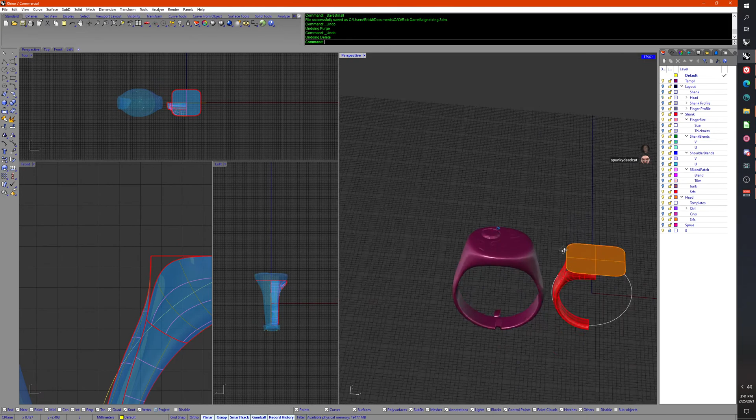I'm dropping frames because of the network. Okay, I gotta... Oh no, my network is crap. Spunky, can you see? Can you look at YouTube? And I'm like rotating the rings around. Yeah, there's a little bit of a delay, but is it choppy? Is it bad quality? All right, I'm getting red flags from YouTube about dropped packets, but we'll go with it. Okay.

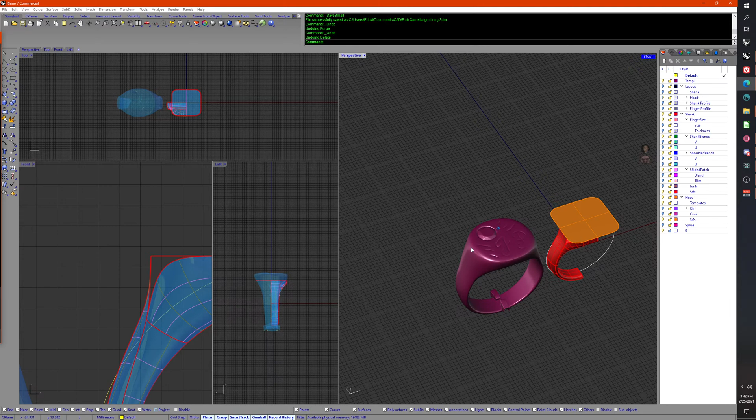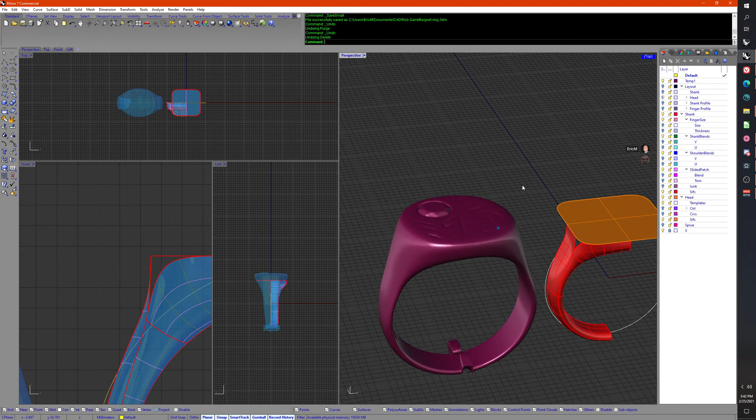All right, let's do this. So I hate making signet rings, and it's one of the things I use Rhino 5 for a lot, VSR shape modeling to make this corner. Let me pull this up real quick to show you.

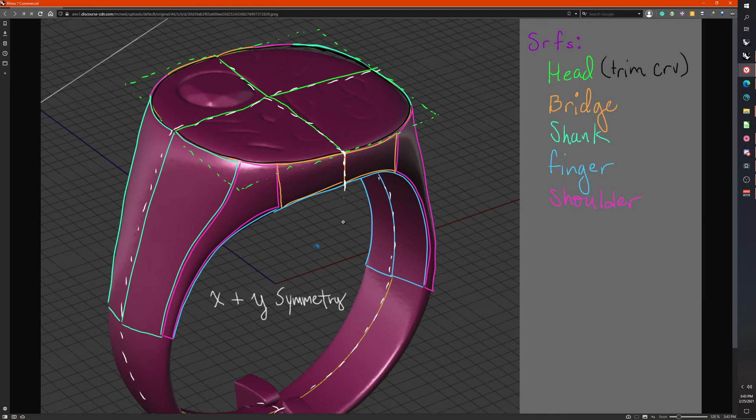Okay. So this is kind of the problem with making signet rings: you've got the head, which is pretty easy to do. You've got what you would typically call the bridge section of a ring, which is easy to do. The shank inside the finger. It's this shoulder. The shoulder, you always work yourself into a 5-sided surface, and that's where the unfun part comes in. So I usually take this into Rhino 5 and use virtual shape to make this.

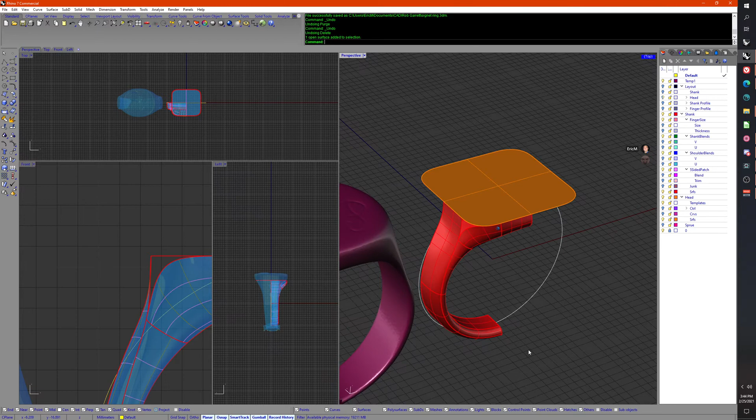And that really destroys any ability to do history. One, because I'm going back and forth to Rhino 5. Rhino 5 doesn't have the same history stuff that 7 does. And this does not look like a ring that's made for history, but I think I figured out a way to do it pretty okay.

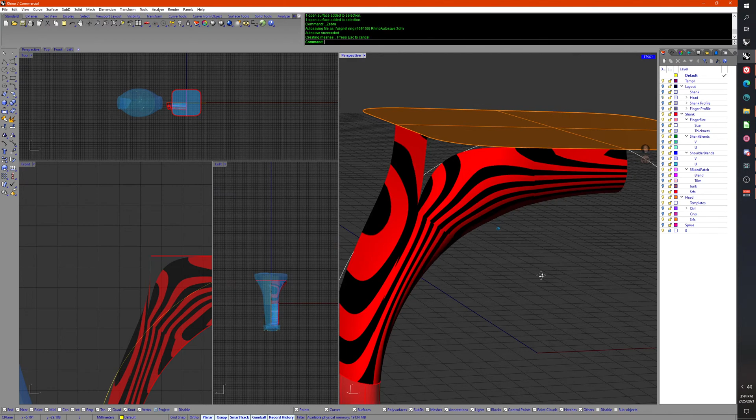Now, I'm not going for mathematical continuity between these guys, and in fact, it probably won't pass analyze surface zebra. It probably won't pass a zebra test, and that's okay because it's going to be a rough cast surface. I just don't want it to be lumpy. And I can see right here that it's got a little bit of a lump. As long as it's not too bad through here, as long as this is smooth, then a little lumpiness over here is fine.

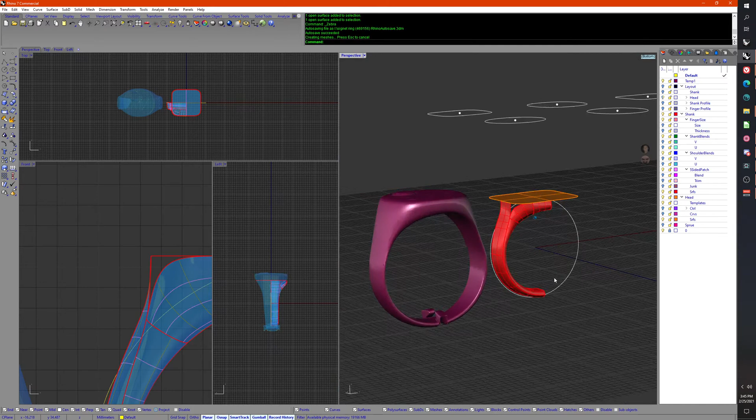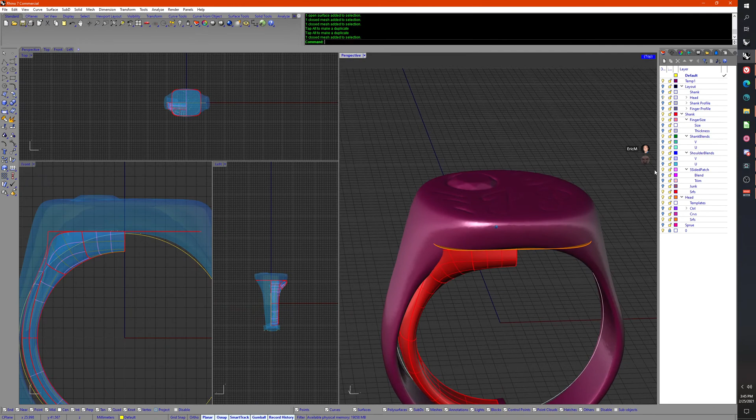So I made it into a different top shape and different finger size. This is the finger size that we're going to. This is the shape that we kind of want to emulate. So we're going to pop that over here and just kind of center it. It's a 40-year-old signet ring that was hand carved, so it's not perfectly symmetric, but that's okay. So I've got that on our temp layer so I can turn it on and off, and we'll just lock it so we can't accidentally select it.

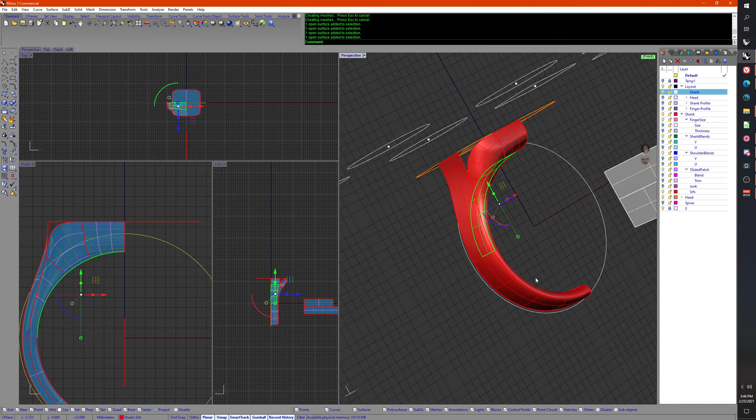So you have a layout panel here. The head, so this controls the height of the head over the ring, and we have this, which is where we do our layout curves. Those will come up down here in the head. All right, so we have the head for the shank. This is just for doing history stuff. So this maps to this, and this maps to that. And it's for putting down some curves so we can get a blend that's not really lined up with an ISO curve.

In fact, when I look at the Shank Blends, these guys, you can see they're coming off at an angle, and they're over here for me to edit like this while I'm looking at the shape of it over here. So I can see that's not the shape I want. I want it to kind of be straightish. All right, so those are our shoulder blends, and that's the shank. I showed the head.

Then we've got two shank profiles. We've got this one and this one. Now, usually when you do a signet, you would have one profile, but this profile is tied to the inside shank surface. So that's the finger profile. And I did two, so you could make these comfort fit. The outside shank, which is this guy, the outside shank and the inside shank. Put the left view on here.

You can see that this is the inside, and you probably won't have to edit it unless you move it back to a standard, like if you pop this out to be the same level, like you were going for a regular signet. And I know that blend is kinked. That's something we'll have to fix. But you shouldn't have to move it unless you're changing this from a comfort fit, and that's what I do most of the time.

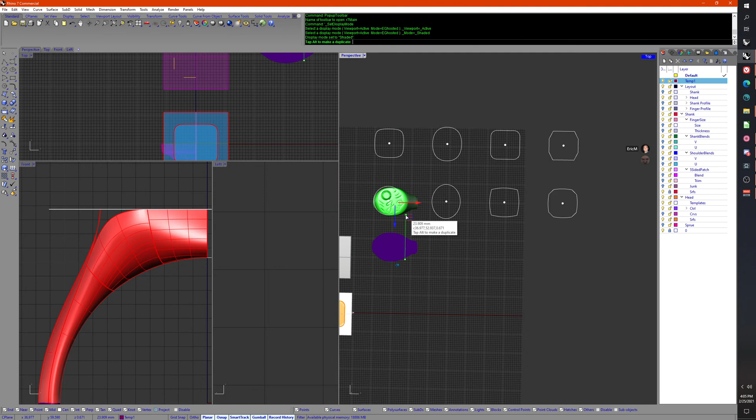Just show everything. Okay, so we have templates over here, these are common shapes that I can just grab for tracing. The curves are still off. So let's look at our ring and see which one it looks like the most. I'm going to change this to shaded. Oh, changed the wrong viewport. Shaded. And let's just see, not quite round, but it's roundish. Okay, so I'm going to grab this template and just move it to the center of there. Okay. And we can lock that.

Your control curves are these two curves right here. You have junk, which is the blend between them. And there's probably some more junk over here. Let me turn that off. The curves that actually make up the surface, that's these guys, and then the surface itself. So that's pretty much it to the head. It's a lot simpler than the ring.

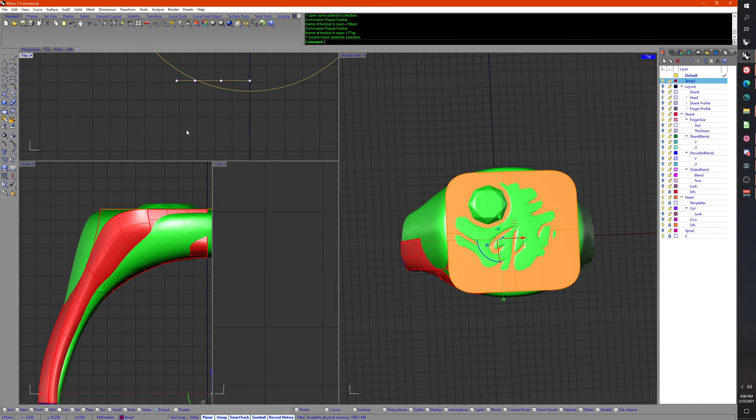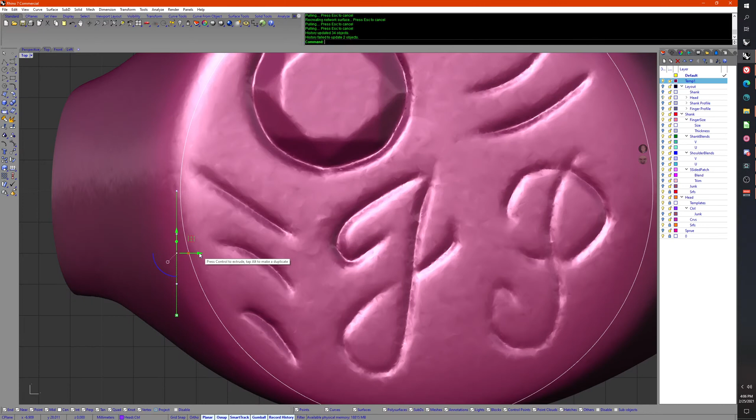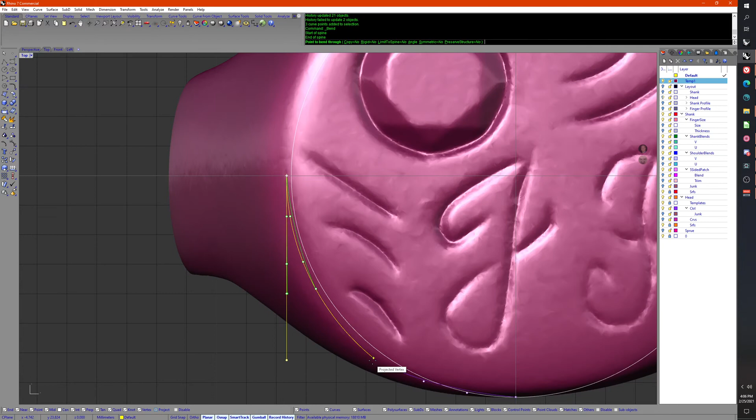So I'm going to bump this up by 30 so it's underneath. And I use 30 a lot in modeling for setting up different areas. And this, we'll set that Y down to there. And this, it looks like a little bit wider circle. Maybe something like that. And then leave these points on. And just kind of bend this up. Bend. Just kind of bend that in.

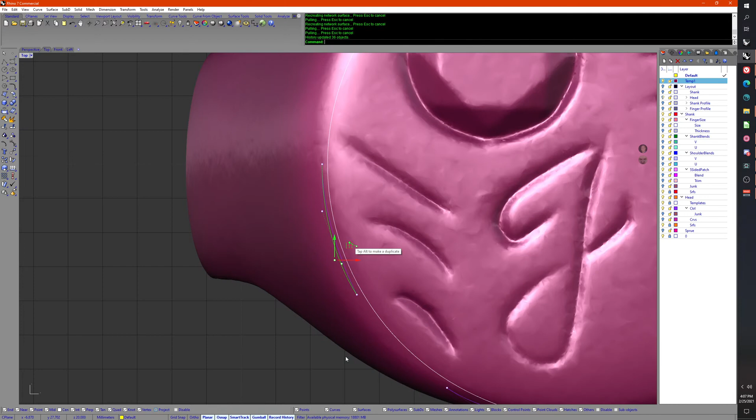This needs to be on the same X though. So I started bending a little too early. Nope. Well, that looks lumpy. Does this look lumpy? I'm not used to this layout because, okay, so we need to edit this to reset it because Rhino things. Still looks a bit lumpy.

It'd be easier if I was just actually matching this white curve instead of, you know what, let's do that. Because this is basically a little bit wider of a circle.

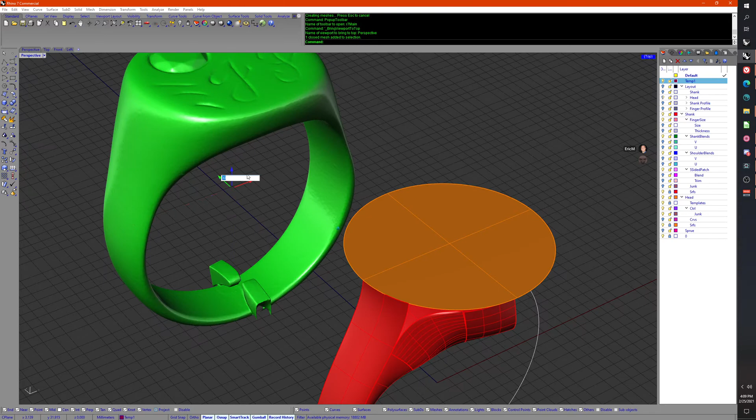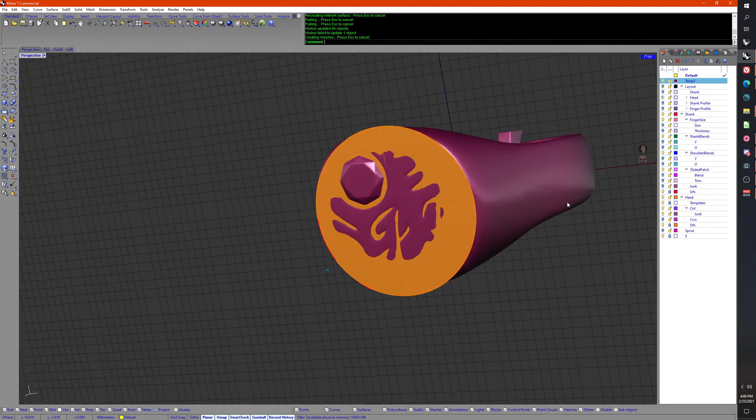Just match that up. Edit that. Boom, boom. All right, we need to give it a little bit more breathing room. Okay, that's a lot smoother. Okay, so if we look at our ring and bop that back -30, we need to make it a little bit bigger, I think. Scale 2D off of there. Okay. I think that looks good.

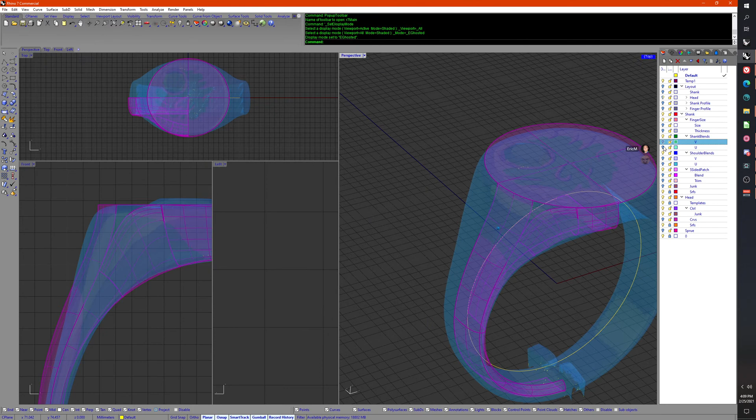Okay, so this shank is, let's go back to our normal views. So this shank is tapered in too much. The guy really liked this older class ring and he wants one just like it. So we did our finger size. We did that first. The thickness is okay. So the Shank Blends, that's the U. Let's look at the V's. There's the V's. Okay. And look, two curves came alive up here.

Take this, move from the endpoint to the edge, and take that, move from the endpoint to the point. And what that did was line up this surface with this edge, because this is controlling the angle of that. So if I want to match that, it's a little thick through there. And again, this was a hand carve, so we just need to get close. And this one, take and get that to kind of match. There we go.

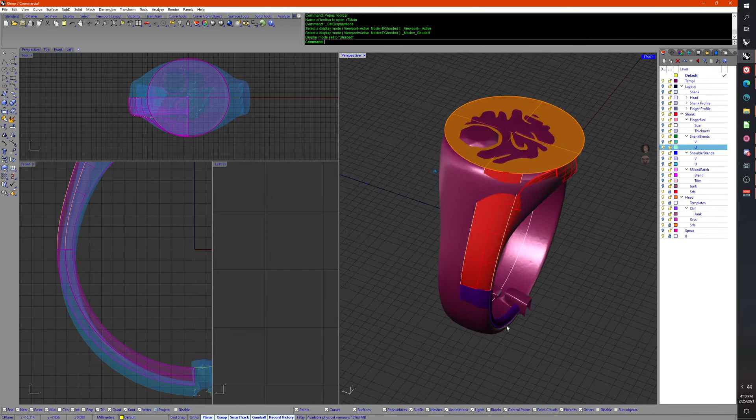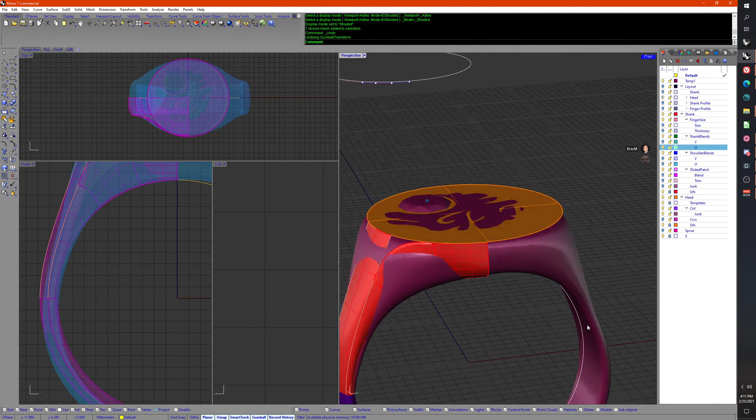So not a perfect match, but that's okay. I think it might actually match better on the other side. Rotate 180. Yeah. See, this side it's too much. That side it's not enough. The one bad thing I'll say about having a scanner is it makes me worry about this stuff way too much. It doesn't matter. It'll feel the same even if it's a little bit off.

All right, let's turn our scan back off. And then you can see that this has fallen out of line. So that was the Shank Blends. And now the shoulder. What did I name it? Put that on. Shoulder Blends U. Okay. So the reason this is all janky right now is because this needs to move to our endpoint. And this needs to move to an endpoint.

And that makes sure these curves line up right with, it's on the junk layer. These curves line up exactly with the segments on this head. Unlock it. We want those three sections to line up with our three pieces over here. And now that does. Okay, let's look at these blends.

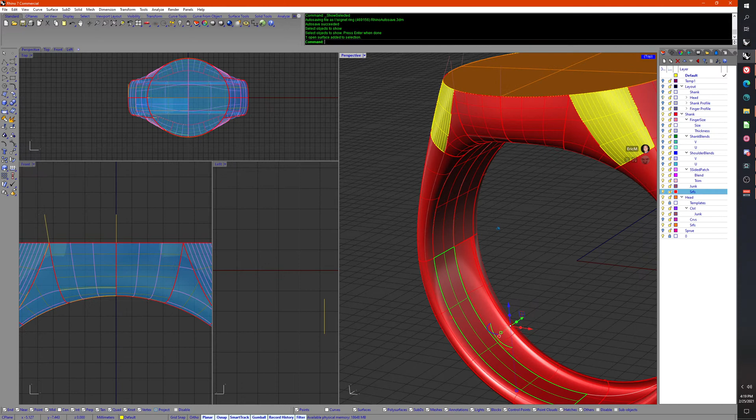Now we unlock everything. Curves are off. We grab our surfaces, do quad mirror, grab that top, grab everything. Did I get the inside? It's probably hidden. Silly me. Quad. All right, grab everything and make sure lock is off because you can't join things if they're locked. Join. And let's see if all the surfaces, nope. Almost. We got one little surface that doesn't match, but that's easy enough to fix.

We're going to explode. I'm going to grab this side. Oh, I did it right the first time. Hit delete. So this is not matching up to this, and this is now a trim surface. Nuts. Okay, trim by isocurve. Split surface by isocurve. Try that again. Split by isocurve. Toggle the direction to there. Grab that, delete, and we are going to do a four-sided surface. Boop, boop, boop, boop. We got that.

Let's join it first before we do all the mirroring around this time. I'd hit delete, which turns lock children back on. Okay, we've got no red lines. Select curve, hide. Yes, all black lines. So that's another thing about my display mode: naked edges are red and closed edges are black. So join, and into one open polysurface because we did not grab the head. Join into one closed polysurface.

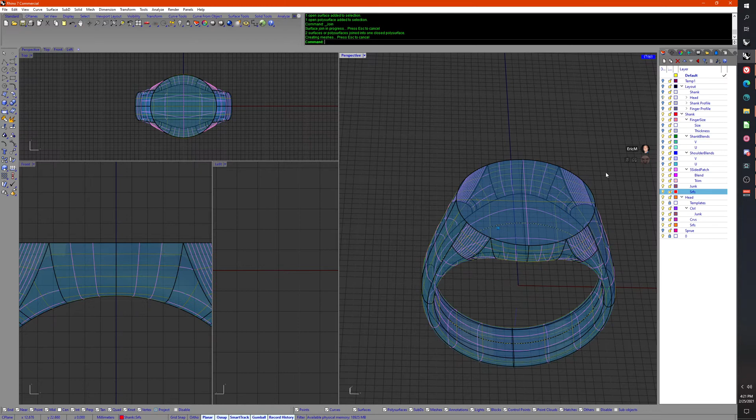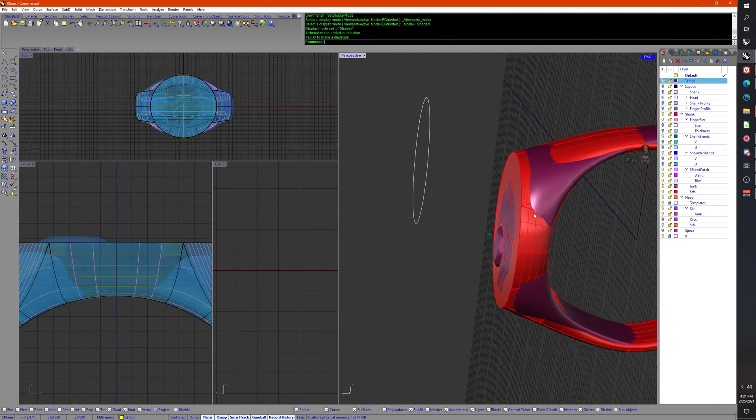And I don't know if I was paying very close attention to our template that we're going off of, but that is pretty close. I think this shoulder is wider, which I could have easily done by extending that blend, but I didn't check it. So we're just going to say that's good. And the bottom of the shank is too wide. Okay, well, easy to fix. Just got to move those profile curves in.

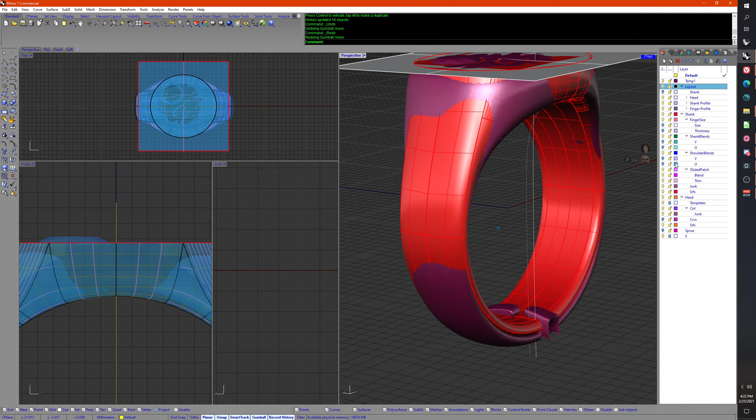These guys, if you just grab both of them and bring them in, one of them was locked. Just grab both of them and bring them in. Did it not do it? It did it. Turn these surfaces, they're all broken off now, and turn on the, you know, it would have made that. So that brought all of that in. You're going to have to fix your blends.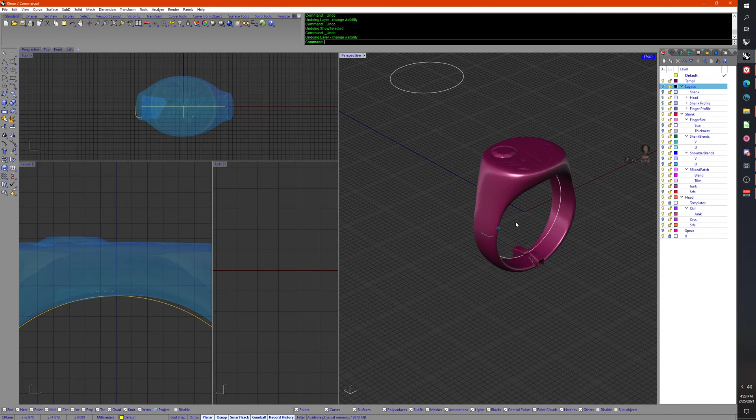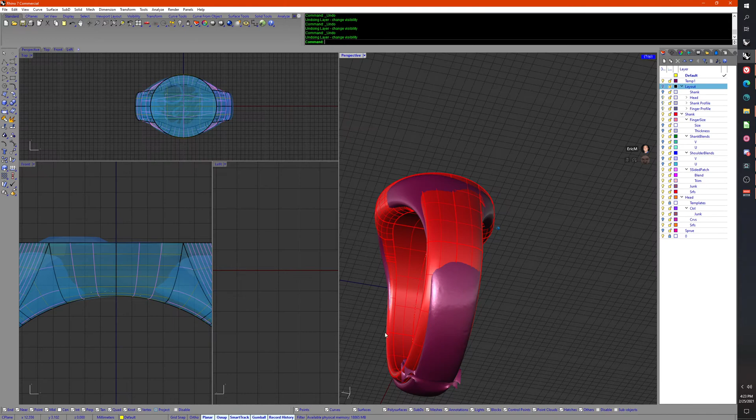I broke history on something. Broke history on that. Okay, well, always start with the template file and then you break it as you go along, but that's fine. Okay, so the shank is a hair too wide at the base, but other than that, I think this is a success. I don't know, what do you guys think? See, I matched it on this side, but I didn't check that the shank was twisted, and it was. So it matches on this side where I lined it up. But again, hand carved, 30 years old.

Oh, I'm surprised that doesn't line up. That doesn't line up. But that's okay, because when you get to this point, right? When you mirror this around, just break history on it and explode it. You can just do a match surface right here. Match surf between these two edges. What is going on here? Did I type match surface wrong? I'm better at clicking buttons. That and that. Average the surfaces, go for tangency, okay.

And that'll get rid of that little, like there might be a little weirdness here because we never specifically set the tangency. So you can go do average surfaces, tangency, okay. And now those two will match. I did do those two right. Why is average? Oh, this side's not exploded. Explode. Match this and this, and average, and okay. And now you've got tangency there.

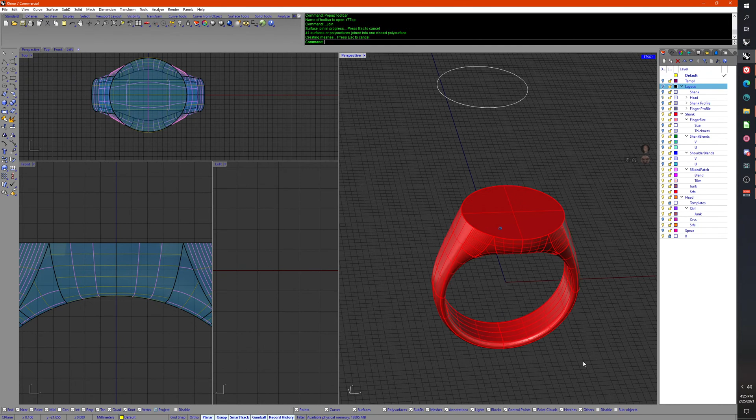Join. And we can check it. Oh, I could have read it up here. And one closed surface, so it is closed. And we got rid of that little weirdness. I don't know why that should have lined up on its own the way I built it, because our head curves, these two should be on the same X. Yep, they were on the same X. So I'm not sure why that got off tangency.

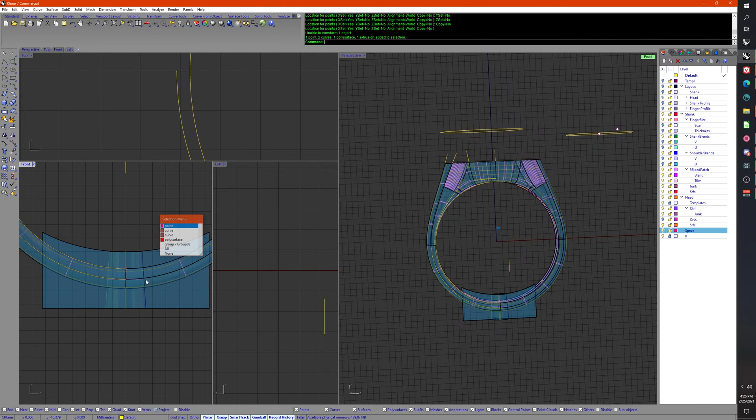And the last thing in this file is a sprue. So this little sprue in my template, there's a little dot right there. You just take and move that from there to the bottom of the shank. And then you've got, I think it's like almost 4 millimeters. It's 3 millimeters. Which that's where I attach it to the tree. And I just cut this thing off. Shaded. I cut that thing off, just score it with a razor blade and wiggle it at the corner and it'll fall out. I cut that off before casting, and then just take that straight to the tree and you're done.

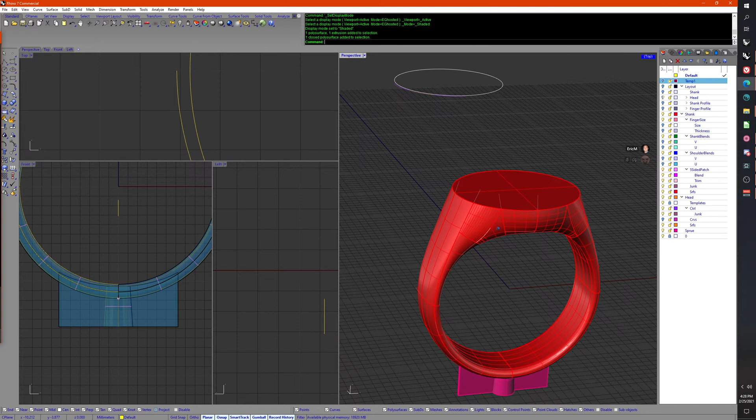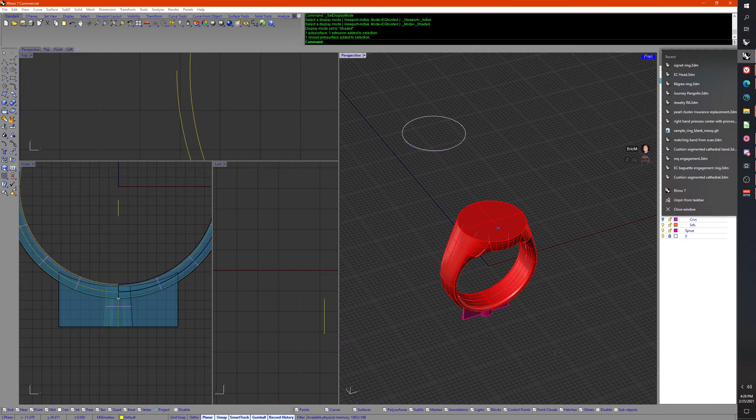Well, I've got some other template files that are less ambitious than this one, and maybe I'll cover those not in a live video, but actually record a video. I'll give you a preview real quick. Let me hit the be right back.

Okay, so this is my template for emerald cut heads. So this is a little arc that you use to match your finger rail. So whatever the shape of the finger rail is, you just scale off of 0, and it'll match the profile of your finger rail. Undo that, but let's see, we could turn off junk, curves, flow. Actually, I'll turn it all on and just point to it quickly.

This curve controls all of these curves, which flow onto here. I do need to turn junk off if I'm going to show that. And then you can change the shape of how these guys flow onto here, lets you change the shape, and then it flows onto this surface, which lets you bend it around a little bit, or raise it up and down. But it's an emerald cut.

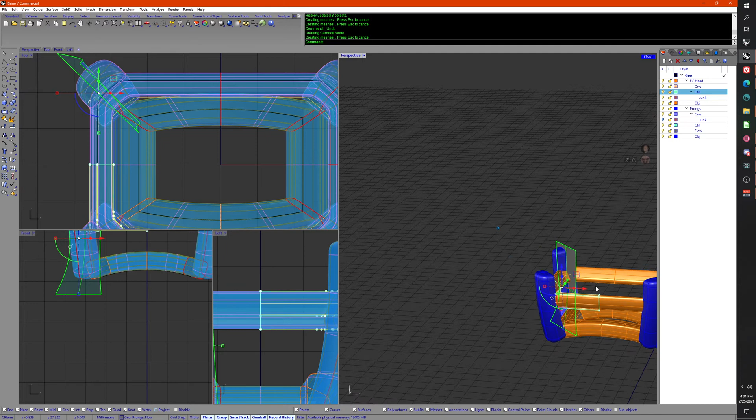And then these control curves here: head, control, select objects, points on. You just take and grab whatever your width is. What did I grab that I shouldn't have grabbed? Oh, I know. Turn the points off for that, turn that off, and select control, points on, whatever your width is, whatever your length is. Take this flow surface and put it on the corner. If you need to change the angle, you can change the angle. And then, yeah, that's pretty much it. Oh, the base needs to match. So you just take that and slide it on down, and then that'll line up in the corner.

So I've got that one. What would you guys like to see? Me making this template from scratch, or just how to use it? Let me know. Oh, that got really wonky on me. Didn't mean to do that much.

But this is just nice if you need to twist it, because sometimes you need to twist it to fit flush, blend in with something next door. Sometimes you need to twist the bottom, so there's an extra step here that lets you do a little twisty to it. But it's just a loft, or curves, flow along curve, a loft, flow along surf to here. And you get 2 lofts that you can join up. And then I've got another template for 3 stone rings.

So let me know what you guys want to see, like making the template from scratch, just using it, that sort of stuff. Maybe I'll do a video making the Signet ring from scratch, but I'll put it in the Discord so you guys will have mine. But I don't know if it's value, if you guys know how to make it on your own.